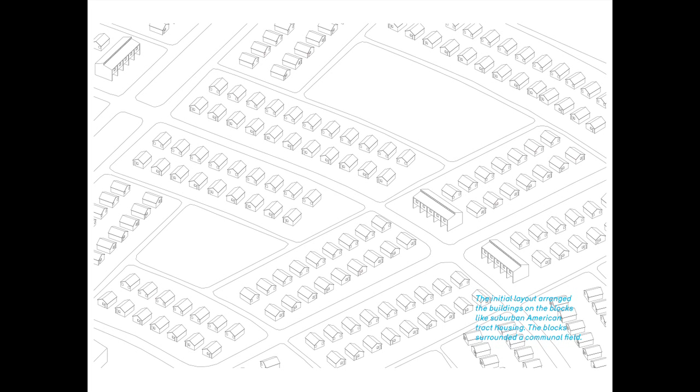Here you can again see images from the beginning. Actually, the original layout was not too bad, at least there were some plazas conceived and a quite interesting diverse pattern for it. Here you can see the same thing in axonometric drawing, and we did research on that, just drawing the houses. This is how it looks now.

Totally informalized. Sometimes you still see the houses popping out. So another layer was built on top of it, right? Sometimes the plazas were occupied, but sometimes they were not. And it became a denser city. It becomes an urban area.

On top of that, nowadays it's located in quite a central area where most of the facilities of the Olympic Games will be installed also. It's the new expansion zone, it's the new center of Rio de Janeiro.

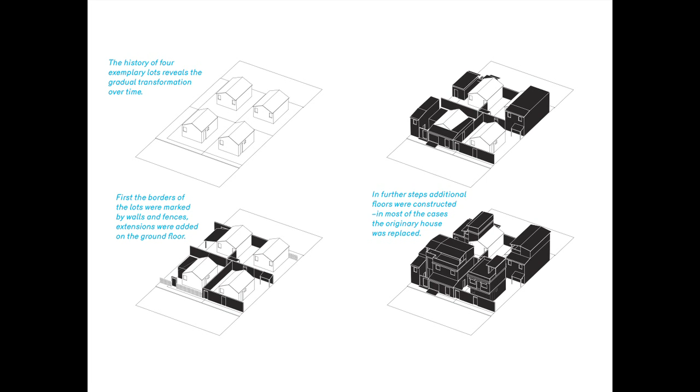So we studied how this informalization process happened from the single family house. They started to first build walls to delineate the private area, and then they added extensions to the left and the right. Finally, they built vertical extensions. This was for us really a surprise, because we went there, we weren't sure if it's secure or not, but finally we realized it has quality.

And because of the merge between formal and informal, you know, the streets are larger than in the favelas, you can breathe, there is public space, but you have the informalization, you have small-scale commerce in the area. So that's why, in certain areas of Cidade de Deus, we thought it's a quite pleasant city, a city within the city.

After that, we became very curious about this question of mass housing in Brazil. And we realized that there is this huge program, this massive program called Minha Casa Minha Vida. It started in 2009 based on a study that identified a housing deficit of 6 million units. The program was launched in a moment just after the global financial crisis that affected also a little bit Brazil, not that much, but also.

And the general idea of Minha Casa Minha Vida was to build 3.4 million units until 2014, and this had to be done also as an economic driver. So they wanted to stimulate the construction industries and at the same time provide social housing. A model that you can already put in question, if this works, to use social housing to stimulate the economy of the country, but that was the idea.

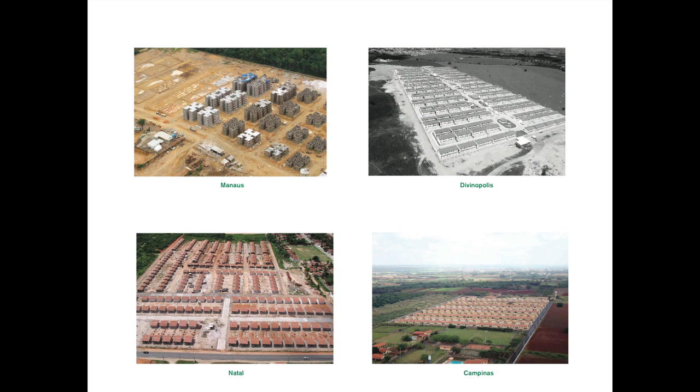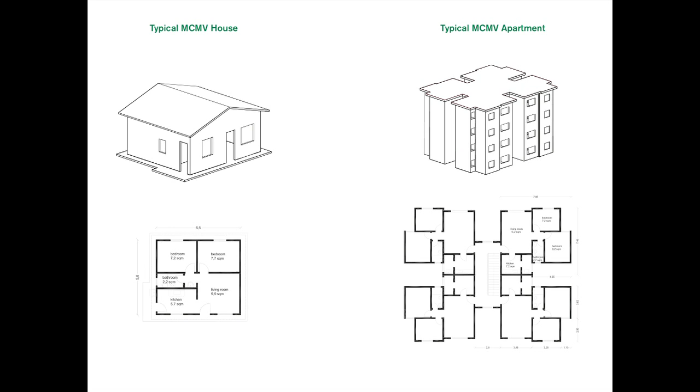So it's mainly based on the generic model. Here you see block buildings, and here you see the single family houses. Usually it's based on a very repetitive pattern. Again, the single family house has between 35 and 45 square meters. And then the slab buildings, obviously, they have the same amount of square footage, but these are apartments. Similar to Cidade de Deus in the beginning, the idea is to give access to home ownership. So the program is a financing plan to give people a private property, really low-income people.

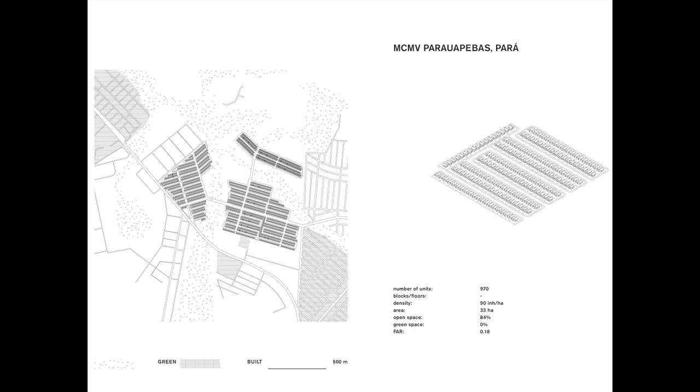Here are some models. It's super generic. I would even say it's more generic than Cidade de Deus in the beginning. These are the worst examples. There are some better examples, but they are in remote areas because it's cheaper over there. And you could basically say everything you can make wrong as an urbanist and planner is made wrong here in this program. It's a slap in the face for urban planners.

We were curious about this project. We were researching it, holding it against the favela experience, right? And the favela experience was also stimulating us to do a research on popular Brazilian architecture, APB we called it, because we wanted to hold the specific against the generic. We wanted to see what is specific about Brazilian spaces, what is specific about the popular way of building. And that's why we did just a collection of elements inspired by Christopher Alexander's pattern language.

Here, for example, the favela as an area that is built out of one material, which actually has a quality, I think, if everything is built out of one material. But then also details like the bucket gardens that stimulate the spaces with a little greenery. But also elements like the cobogó.

Cobogó is super interesting because it comes from vernacular architecture, translated by the modernists and becoming a typical modernist element because it is also serving for ventilation. Nowadays you can find it everywhere. It's a popular product. Everywhere in the favelas you have cobogós. So it's a transversal architectural element.

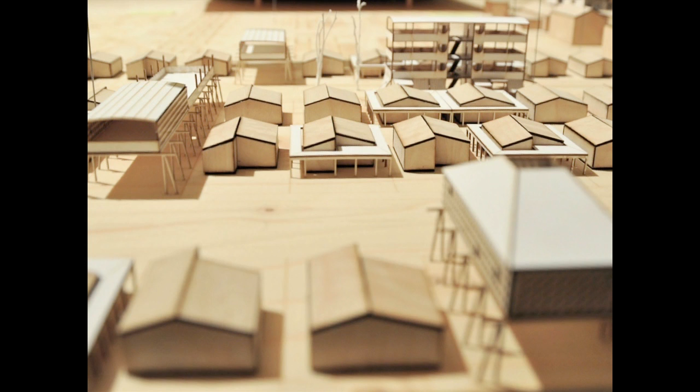I just show some images of models where we test building interventions inside the areas, and we also apply the APB, the Popular Brazilian Architecture Catalog, in our buildings. So for example, this is a housing type that has a garage shop, a very popular element, that they just transform garages into shops.

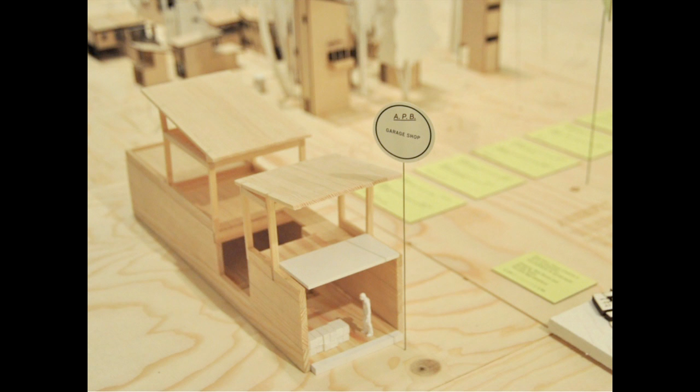Interestingly enough, when we presented the exhibition in Studio X, it was exactly on the same day when the major protests, demonstrations happened in Rio. I don't know how many people were in the street, 1.2 million, 1 million people in the street, exactly in the same moment where we had the talk here. It was becoming really crazy, like a war zone outside. But the people from the Ministry of the Cities, they were curious, and some of them came. Some of them made it, others were just stopped at the airport because the airport was totally shut down. And in this situation where people were calling for more public services, claiming more participation and so on, this situation was very emotional.

And even though we criticized the program a lot, of course, the people from the ministry, they liked it. They were so emotional that they said, yes, you're right. The Cidade de Deus example shows it. We have to do something. Now, when already 1.2 million units are built, it's almost the end of the second phase of the program. But they invited us to do a project, which was sponsored by the Vale Foundation, this mining company that operates in Pará and other parts.

It's the second biggest mining company of the world. And they asked us to develop additional guidelines on top of the Minha Casa, Minha Vida that will be sponsored by funds of the Vale Foundation. And with these guidelines, the generic model of Minha Casa, Minha Vida would be improved, would be transformed into a better place. So it's more like incentives.

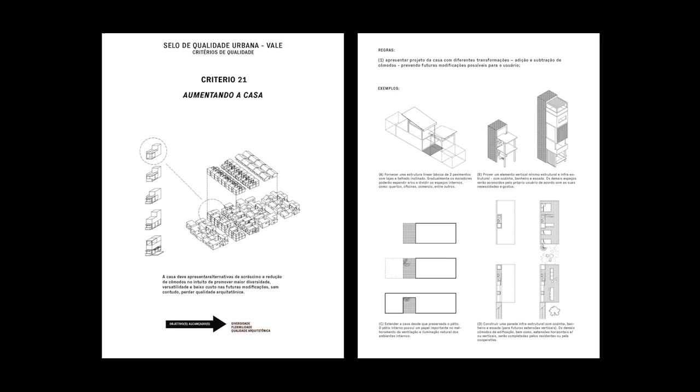The general idea is, as I already explained, there is the generic model, but the city is growing over time, the city is changing over time. Usually cities are changing. It's about an incremental way of building, incremental urbanism. So we didn't want to do a perfect settlement, we just wanted to initiate a process that can be continued in a better way. So we were thinking about growing houses, about a nucleus that would enable the people to make a better place out of the minimal standard.

And we have ideas about flexible floor plans, because Minha Casa, Minha Vida always has the same floor plans, and families are different. I mean, basic things we all know as architects and urban planners, fundamental things you have to do according to the profile, but we had to go back to these basic things to improve the program. So these guidelines, called Selo de Qualidade Urbana, are about basic things that would improve the generic models of the market.

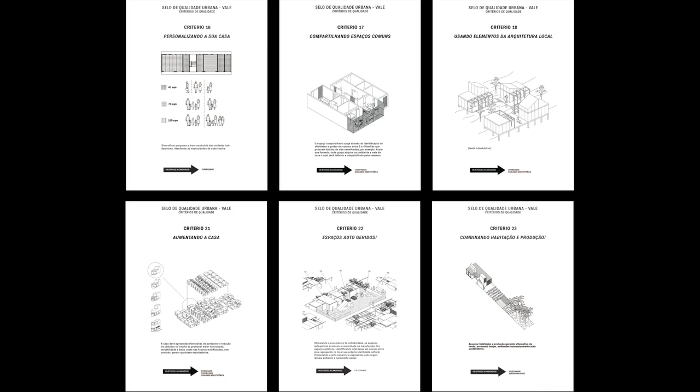And I think this is not only valid for Minha Casa, Minha Vida. Most of the architecture production in the world is generic, done without architects. It's just a copy-paste mode. And here we tried to include the popular intelligence and also the lessons from the favela in this program in order to make a kind of convergence, the merge between formal and informal, which we think can really lead to a more sustainable model if it's done in the right way.

And in the end, I would like to read one thing, because APP is also inspired by MPB, Música Popular Brasileira, which is very wide-ranging. There is samba, there is folk, there is rock music. It's a big mix, a hybrid that I think also brings people together, because everybody is listening to MPB. And some of the proponents, like Gilberto Gil, who was also Minister of Culture for a while, were part of this movement within a special branch called Tropicália.

Tropicália wanted to open the Brazilian experience to the international context. It was about inspiring Brazilian culture by rock culture, by pop culture, and so on. And the favela experience was very important for the tropicalist musicians, but also artists like Hélio Oiticica. And one of the albums Gilberto Gil did is called Refavela. And I just want to quote one thing, first in Brazilian.